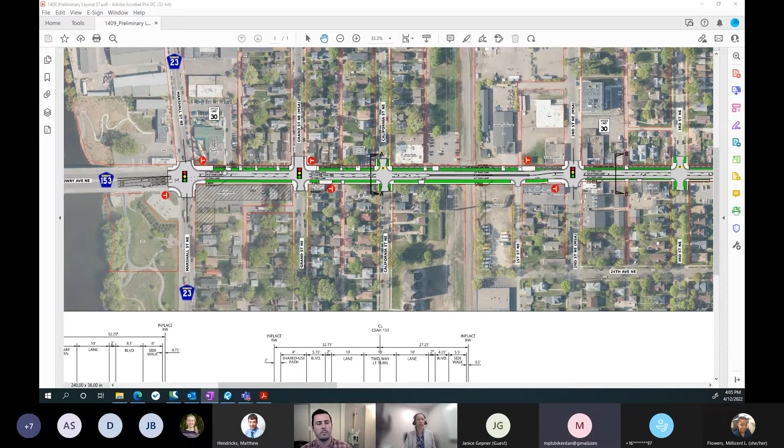The layout that is in the link in your agenda is the one that we're looking at on the screen now, and I think it addresses several of the items that were brought up as a result of the presentation in December and your resolution after that.

We've also looked at moving the shared use path to the north side of the roadway. Previously, we were showing it on the south side of the roadway.

Another big change to the layout since you last saw this is that in areas where we have three lanes for vehicles next to one another, we're looking at a 10-foot width there for vehicular lanes. Previously, we were showing 10.5, I believe. The outer lanes would still have a 2-foot width of curb gutter to the face of curb to use if needed.

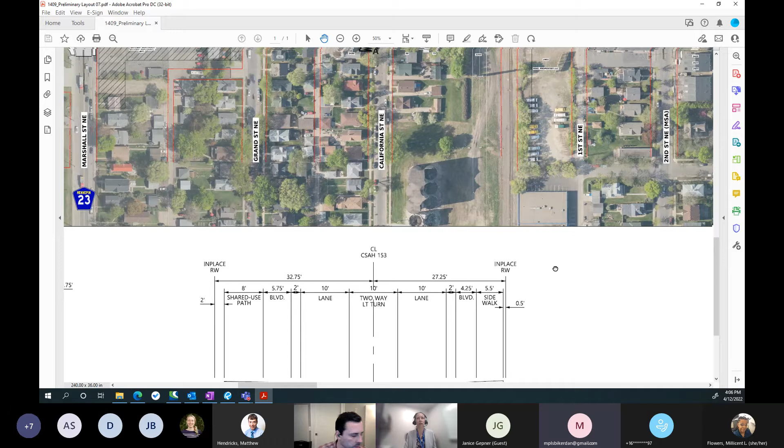But currently, this is how we have things depicted in the layout. What else can I point out here?

Another update as we scroll through the layout and get to the intersection with University Avenue is that we're showing a much less abrupt shift in the alignment along Lowry Avenue through this intersection.

Mostly we were looking at ways to minimize major impacts to adjacent properties and businesses and trying to avoid as much acquisition as we could while still accommodating a WB-40 size truck turning movement at this intersection from the MnDOT Trunk Highway to the county roadway.

But that still leaves a good amount of space on the north side for a shared use path configuration here. I'm just going to keep moving through the layout and try to point things out as we go.

We're looking more closely at the space that we have under the BNSF bridge overpass, and I appreciate the example that you pointed out in your resolution to look at a similar configuration on 18th, I think it was. So we did take a look at that.

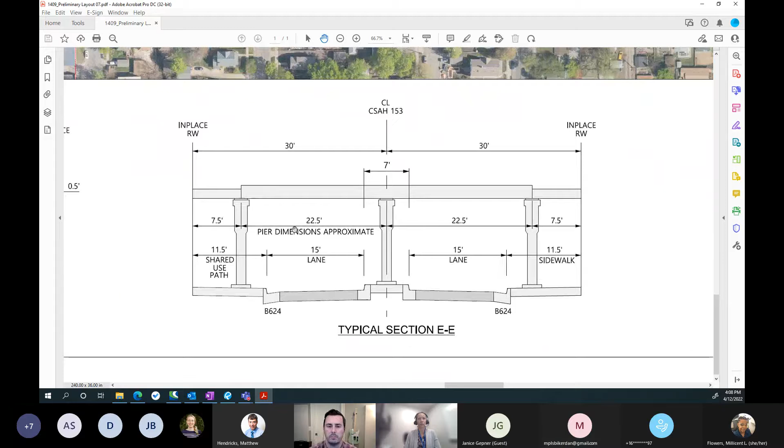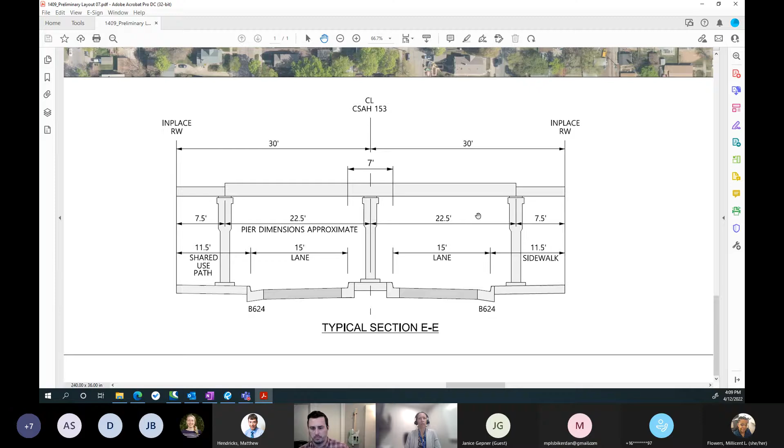We're pretty constrained on space under the railroad overpass and are looking at where the piers are today and how we could make changes to the roadway underneath the bridge to still have space for bikes and peds to get through. So this is one section included in the layout that you all have as well, to look more closely at the dimensions here.

I might be going a little quickly through this, if there's questions as I go. I'm not monitoring if a hand was raised yet. I don't see any, but you can jump in with a question anytime, or I can just keep scrolling through and we can look at questions at the end as well.

Also to note with this version of the layout are the transit symbols depicted as the black and white legend, which are local service stops that Metro Transit has plans to remove as part of this project, and kind of consolidate some stops as we go along the corridor to areas that are a bit more utilized based on their records and their counts.

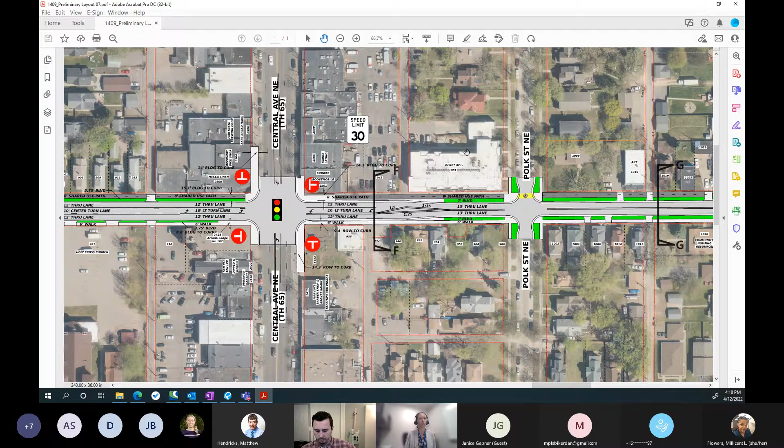We are looking at space for a possible future bus rapid transit line on Lowry Avenue, and we're looking at space for platform areas at the Lowry Avenue/Central Avenue intersection as well, exploring that with Metro Transit to make sure we're not designing something that would need to be completely redone when they come through with a future BRT line in the next 10 years or so, which was their estimate.

Let me go back to an area with medians real quick. We're showing cut throughs for crossings in median areas that were not depicted in the layout before.

Otherwise, previously we were looking at a shared use path east of Central to Johnson Street already. It was on the south side and now we're showing it on the north side. So that is an update in this segment of Lowry Avenue. Otherwise, nothing else has really changed here.

With the exception of adding a median at the Fillmore Street intersection with Lowry Avenue. This is where Metro Transit sees having a stop for local service instead of the stops currently at Taylor Street and Pierce Street on either side. So we're looking at putting in a median here to discourage vehicles from passing around a stopped bus and still stopping in lane.

I think those are the highlights of the updates that I have for you this round. Chris, did I miss anything? No, nothing that I can think to add right now. But yeah, happy to take questions or comments from members.

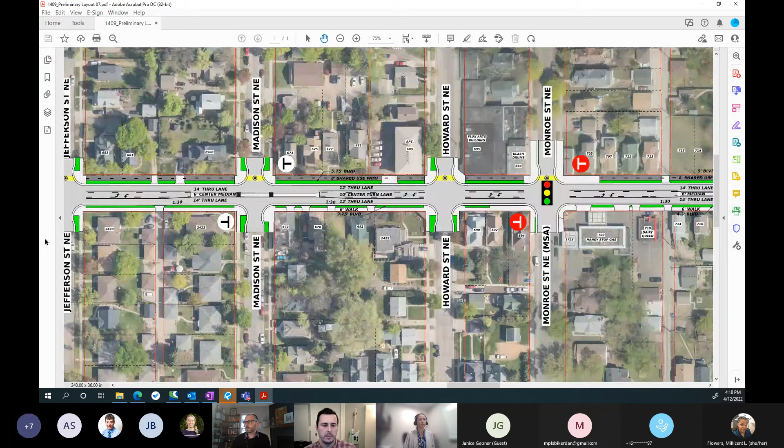I'll confirm that is shown on our AAA network, so that's a useful thing to point out. To address the first question about the bike cut-throughs, I think the city is interested in looking more closely at that, specifically for Fifth, which I think is the only one with a median that's also on our AAA network. That's something we can take a closer look at. We also haven't gotten to the discussion of what this means for emergency vehicle access and whether it needs to be mountable, so there are a couple details with those closed medians to figure out yet.

Okay, if we're ready to move on, Joey?

Between about 4th Street, my question is what is the minimum width you're looking at for the boulevards? From 4th Street northeast to somewhere east of Central, you're showing an 8-foot shared use path and a 6-foot boulevard. I like green space as much as the next guy, but 8 feet is really going to be pretty narrow for a bi-directional bikeway shared with pedestrians. So I'm wondering if you could consider making that even a 4-foot boulevard in that area to get the bikeway up to 10 feet—that would be very, very appreciated.

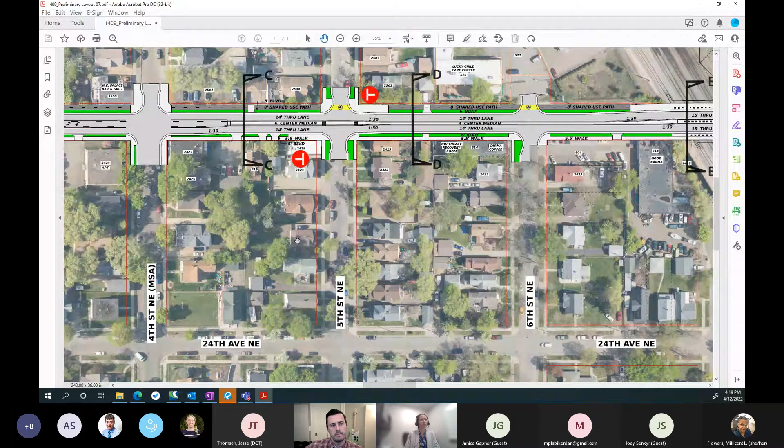Sure, I appreciate that feedback. We're definitely trying to show it as a 10-foot shared use path where there's a good amount of space to do that. In the location you're talking about, we're currently showing it as an 8-foot shared use path. We're looking at existing retaining walls along Lowry Avenue to minimize impacts to those, and also looking at ways to make sure we have space for pedestrian lighting enhancements along this corridor. Those bases take up some space, and you need some clear zone around them too, so it's a lot to fit in, but the width of the path is definitely something we'll be looking at more closely.

Could I add a word on some of the constraints? We're also dealing with above-ground utilities here. There's a big flood issue along this corridor, so stormwater infrastructure is something we're paying a lot of attention to, and as you're pointing out, there's not a lot of room to work with. Just want to put out there that those are a couple of the other things, as well as transit stations and being able to fit the path in to work with a BRT shelter eventually—just a couple of the constraints we're working with.

Thanks, Chris. Okay, Phil?

Kelly, thank you, it's great to see the improvements here. Simple question, I just wanted to clarify that the yellow markings are raised pavement as we cross. Correct. All right, yes, great. It's looking good, thank you.

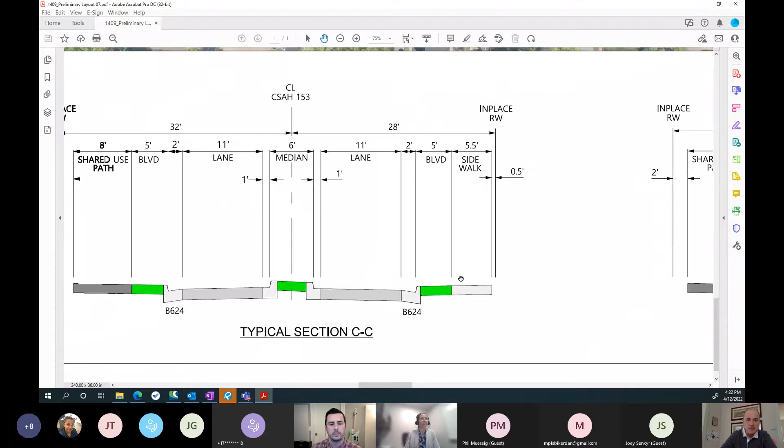Oh, okay, so it's 11. Yeah, I didn't mean to interrupt your train of thought there. Just wanted to share the typical section to give a little more context and clarity. I see, and the 14-foot width all the way to the curb face on either side allows space for county maintenance vehicles to get through for snow removal purposes and that kind of thing.

I see, okay. I was going to echo the sentiment about the width of the shared use path. It would be sad to ever see a boulevard constrained just for the need of trees, but if there could have been a way to get that out of the travel lanes, that would have been wonderful. It sounds like that's already been addressed—I think in these locations with the medians, we're at the minimum we could go for travel lanes.

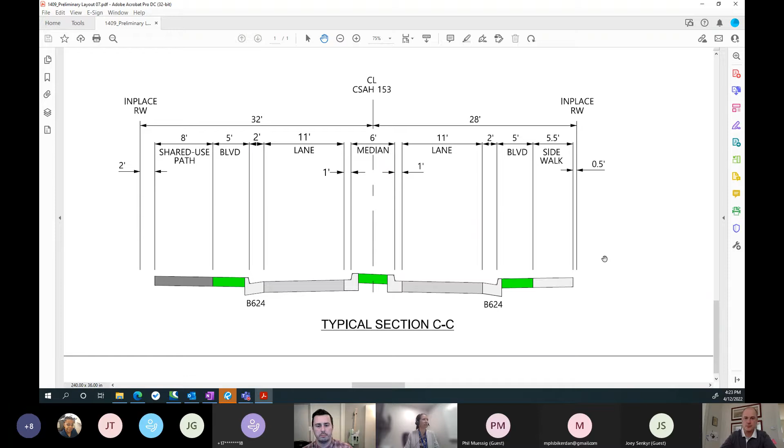Can I make a suggestion? Sorry, I didn't have my hand raised.

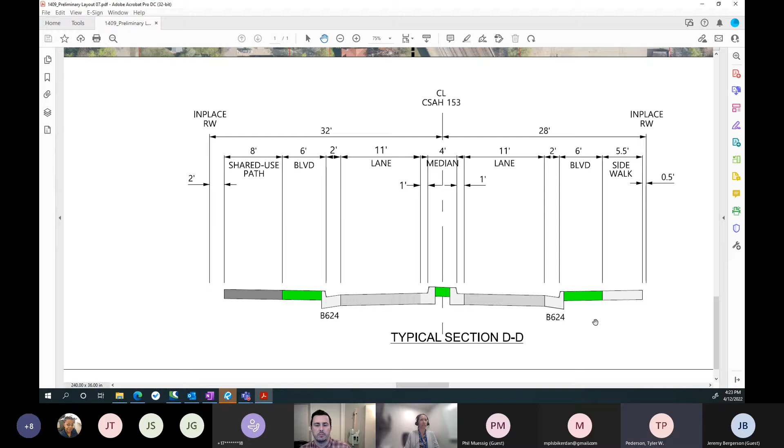This is Tyler from the Minneapolis Park Board. One solution you might look at is shifting so you have less green space on the south side that's shaded by buildings, and more green space in the boulevard on the north side, so you have space for trees and whatnot that will actually accept the sunshine.

Trees aren't going to grow really well in like a 4-foot boulevard. They're actually going to do pretty bad. 5 foot's really the minimum.

So if we did want to increase that shared use path width and take away from the green space, which I kind of never advocate for, being a park guy, I would suggest rethinking how you balance the center of that road, and planting on the sunny side of the road could be kind of nice.

That is a good thought. Thank you. Matthew Hendricks.

I think Matthew might be muted if he is talking. Thank you, I thought I had muted myself and had not.

So my question is similar to the one previous, about whether there is the possibility of shrinking something besides the boulevard. So going back to a 10-foot lane with the reaction zones on either side, so you have effectively 13, or in some places reducing the center median to 4 where 6 is shown, or if it's even possible to go less than 4 there.

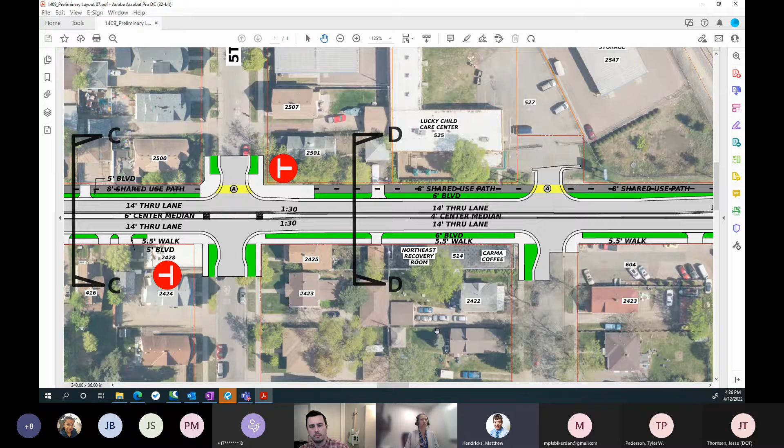I think there might be things we could look at with the median. The lane widths themselves are the minimum from what I hear from our maintenance staff to be able to get our vehicles through. The plows, from one edge of the plow to the other, are literally 15 feet wide or 14 feet wide.

I think it's partly too that when you're pushing snow material along, you need some space to react to the curb so that you're not just plowing along the edge of the curb. Okay.

Okay, I'm going to take a grab at this, Dan Miller. Kelly, you'd mentioned something about looking at some possibilities for underneath that bridge. Do you have any thoughts you can share with us on what you're looking at?

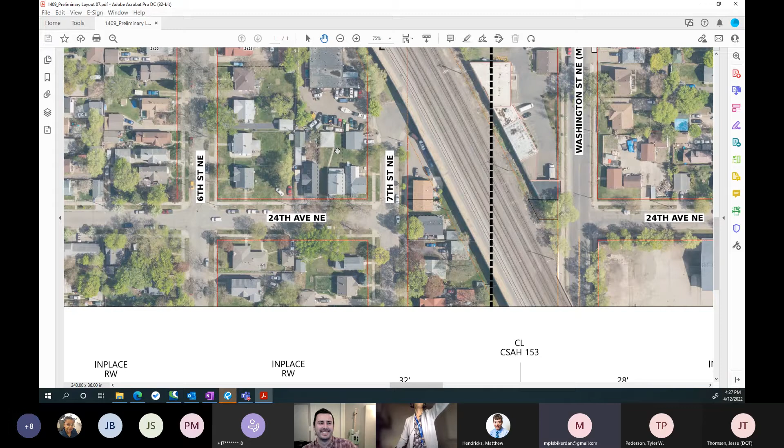Really, oops, the light's gonna go off in the office on me, sorry. Really, we only have the typical section that's included in the layout to show what space we think we have and what we could possibly do with changing the curbs under the bridge for the vehicle lanes. We are gonna look at the space a little more closely, get a little more accurate survey information and data that way, to get all of those little inches that we have under here, a more accurate picture of that.

Okay, just a minute. So there would be a chance that you could take that 15-foot lane and shrink it down and somehow expand the curb or create either a bike ped facility there, so you've got the shared use path for perhaps one type of user and the other for the other.

Right. Yeah, I think there'd be a way to use some space on both sides of the piers here. That's fantastic news. Thanks for thinking about that.

Absolutely. If there are other questions, please let me know. I'm going to go ahead and ask a few questions here until I see a hand.

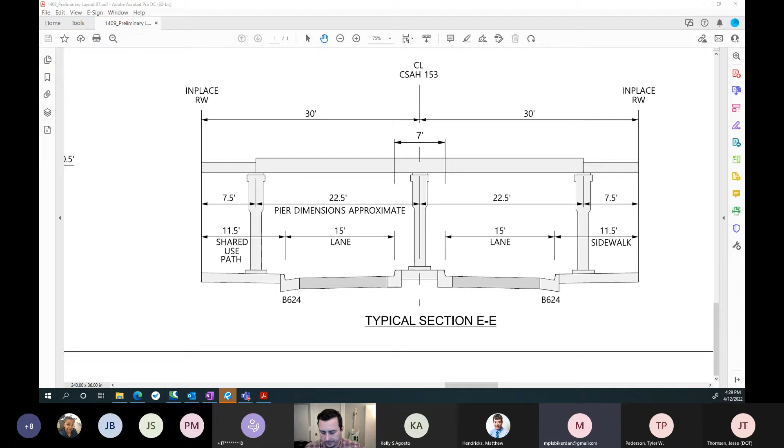We had talked about the raised crossings, and they're still in there, but they're not in the legend. I know that in other cases in the city, raised crossings have shown up on plans but have been eliminated, most commonly because of stormwater issues. How is that looking as a possibility? Is there a serious chance that will happen?

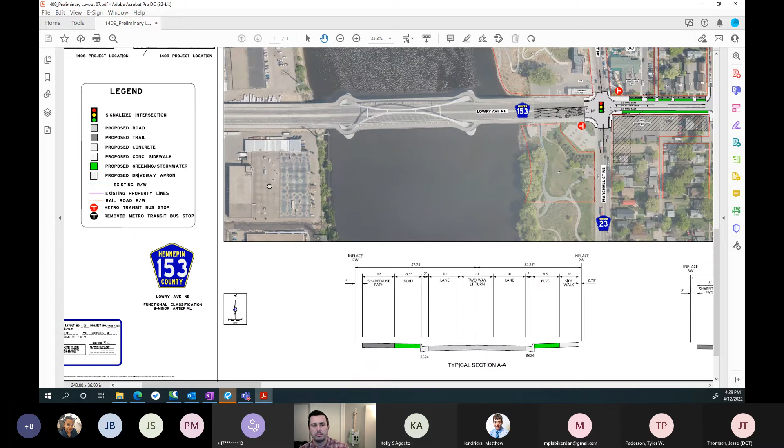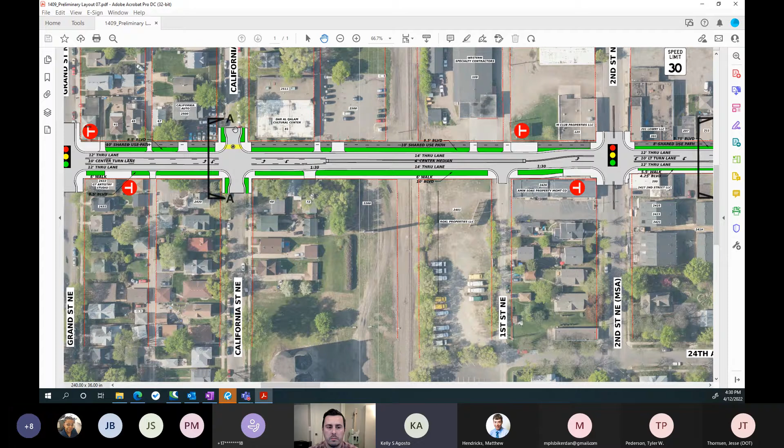Good point on the legend. I thought we had a note here saying we're looking at the possibility of raised crossings. Maybe that note shows up somewhere I'm not remembering, but you're right that there might be an issue with stormwater once we get into that analysis as our design work progresses, which would preclude raising that up through there. It's not a level of detail we've gotten to yet. Once we select a layout, we'll dig into those details more.

I've just seen them come and go, and they've been exciting because they provide continuity and safety to a trail. An ongoing issue I have is that if you don't have a raised crossing, you don't get zebra crossings across that thing, according to our street design guideline. I think both the county and the city should get something going. If we can't have raised crossings here, can we get something, whether it's the green conflict zone plus a zebra stripe, I don't know, but just so we've got continuity and safety on those intersections, that would be terrific.

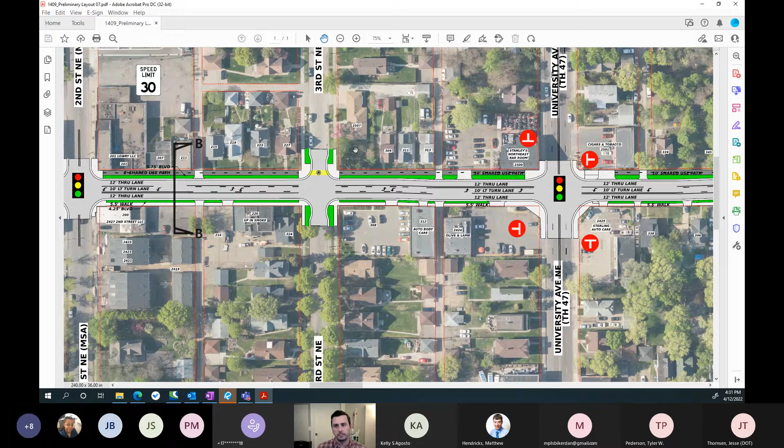And I don't know, Chris, do you have any thoughts? On the raised crossings particularly? Yeah, or just being able to push, if we can't get raised crossings because of this reason or that, that somehow those intersections are identified as a trail crossing.

I would have to look at our typical guidance on that. I think the street design guide shows what the signage would look like, especially if it's raised. Kelly is exactly right that sometimes the reason those don't happen is the engineering doesn't quite work out for the stormwater. But we can take a look at those details, and I'll make sure to keep that in mind, to flag those if they don't go through.

So far in my understanding, the street design guidelines don't address this, and that happened on Johnson Street, and it's going to happen on Bryant. It'd be nice to have a good look at those guidelines. The guidelines say they're open for change, and I think this is a great avenue to make sure that happens.

So I'm sure the path material hasn't been decided, whether it's going to be asphalt or concrete, but the driveways and cut-throughs throughout here, I'm not sure if they're cement and light in color or dark in color. Do you know what you're shooting for there? I think the driveways are being shown as concrete for material right now in our layout, and the path is being shown as bituminous. Because this is a continuity thing, if you look at 18th Avenue, it's a perfect place to take a look at this and ride it.

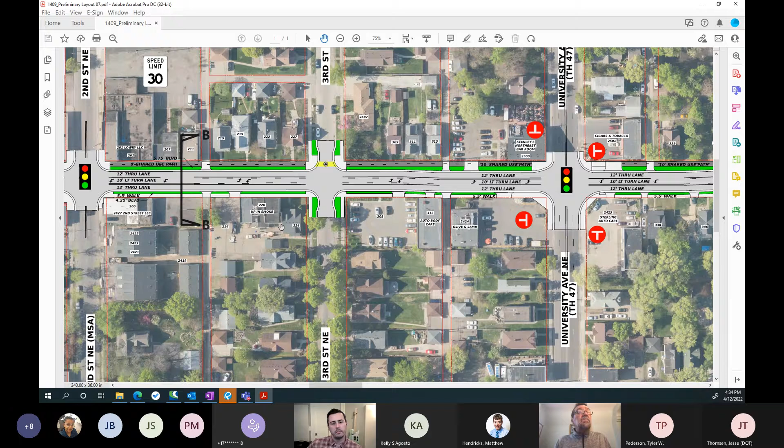No other hands. So one thing I find looking at this plan, I mean it's a great plan, it's come a long way since the last time we saw it, is that the intersections aren't fleshed out as far as how pedestrians move across them. In some cases at 30%, this is typically the last time we see a project, and stuff that may appear at 10% or 15% is really what the public and we are particularly interested in. Would you be willing to come back to show us what has been revised about this?

Well, yes, Chris. We haven't gotten into the plans yet for this project or some of the details that this committee has pointed out in your resolution to be able to address those points. So I think it would make sense to at least address the items you all have brought up and close the loop on that. Well, I appreciate that because you did that on University and 4th and it was fantastic. I know you worked through a number of those things, so thank you for that. Oh, you're welcome. Thank you.

Okay, I don't see any other hands up. Kelly, do you need anything from us? I'd just like to add that we're also looking at shifting the construction year for this project to 2024. We haven't updated our website yet, but we're just needing a little more time to address the layout that we're going to select and get through the design and right-of-way process. We're just looking at the flexibility we have with our federal funding to do that.

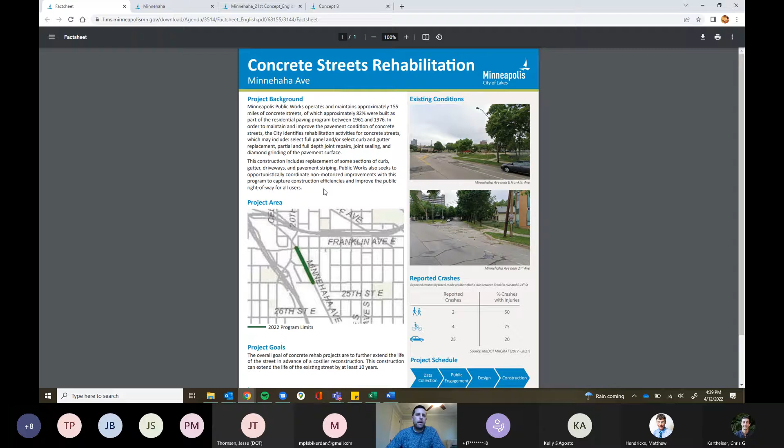And there's also some driveway work as it comes up, a little bit of curb and gutter in spots as needed. But the overall goal of this project is just to extend the life of the roadway ahead of any costlier reconstructions that may come through in the future. Depending on the condition of the roadway and the type of traffic it receives, this type of project can improve the life of the roadway by at least 10 years for the most part. So just a little bit of background, just as a refresher for this program.

Let me bring up a map here of what we're looking at. So this is a fairly short segment of Minnehaha. This dark gray that you see here is the roadway we're looking at. The project extends from East 24th Street to the south, and then heading up Minnehaha to the south side of Franklin Avenue. We won't be getting into Franklin at all. We'll be stopping just a little shy of there where the pavement changes back to asphalt.

We do have two intersections that we're looking at larger improvements for, and that's really what I want to show you all tonight. One intersection is this Minnehaha portion where it meets Franklin, and the other intersection we'll start with first is over here at Minnehaha and 21st. There's some pretty angular geometry that we want to address at that location.

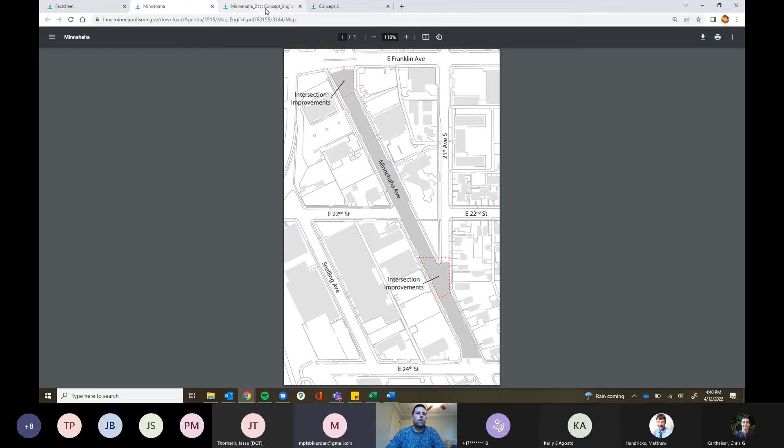So the first location I want to talk about is Minnehaha and 21st, and I'll show our concept for this area. Right now, Minnehaha has existing bike lanes, and we will continue to maintain those, so there's no change in the bike infrastructure here. But we do have some changes to the curb lines adjacent to the bikeway, which will help shorten the crossing distances across 21st Avenue and provide additional safety features, while also adding additional crossings that we're bringing up to grade for pedestrians.

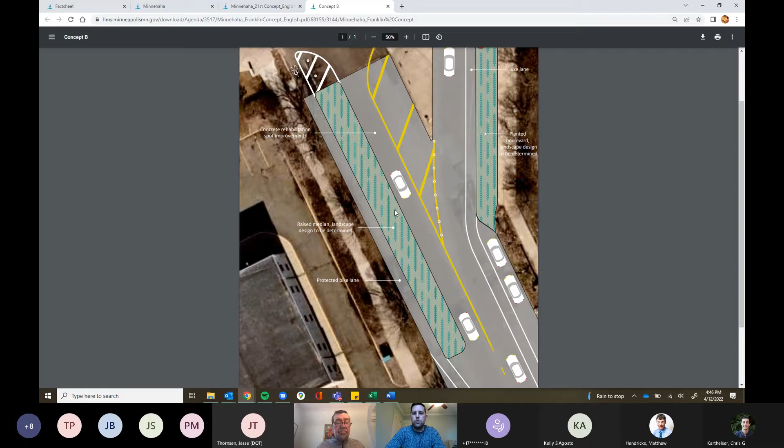Adrian? Yeah, thanks, this is Adrienne Bachheim from CPED. I just had a question about this one here at Franklin. I just went through this intersection the other day, and just north of what's shown in the image here on Franklin, there's that median there, so northbound cars and bikes can't turn left to go west. I'm curious, for a biker going north on this segment, if they want to go west on Franklin, what is their process for that?

Yeah, right now with this, since we're not getting into Franklin, this would essentially be heading the bike lanes into Franklin to go eastbound. Since there's that median there, we still wouldn't have a dedicated space to get out there and make that left turn. If they want to go west, I think maybe one of the options is 24th Street - I can't remember the roadway off the top of my head, but there's an opportunity to go west on 24th and then head north on that route. I think someone wanting to go west has to figure out that routing, and that's just one of the concessions from a few years ago when the county redid Franklin here and put in that closed median.

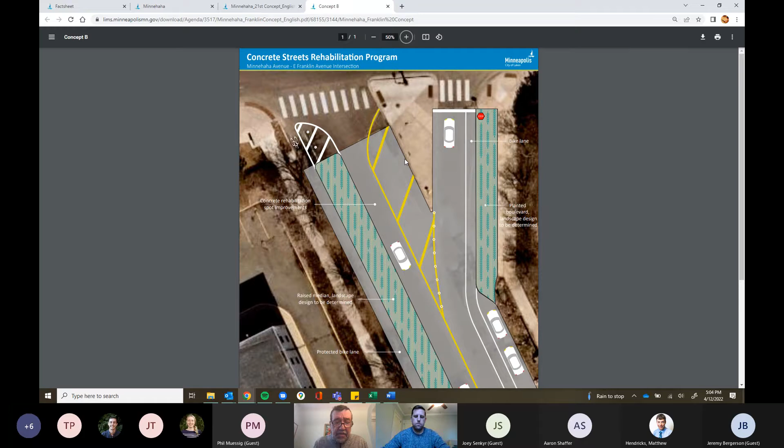And then where Aaron had talked about cars coming around that corner when it bends to the south, would there be a chance to extend that green space so it's more blocky on that corner, so cars can't just ease out of it? In other words, just lower it down and bring it to where the car is right now, the green space.

Yeah, and I'll note this is just kind of the concept plan, until the engineering sets are drawn up. I think they're probably drawn a little better than my Illustrator capabilities. So we'll make sure this has that standard function, so it keeps cars where they want to be, and we don't create a conflict where vehicles are able to just veer out easily into the bike lane. We'll work that out in the engineering drawings.

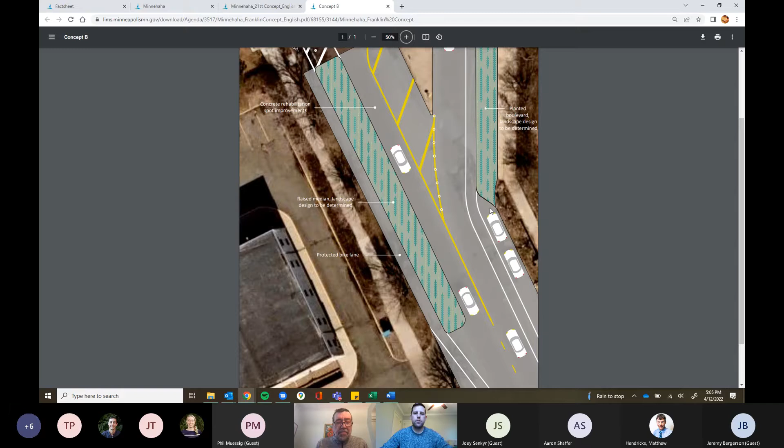Same thing in the other southbound lane where it's just bent in. Maybe if that extended out a little bit to the south, it might be a nicer transition, rather than the squareness that's there. And that could be just your illustration too.

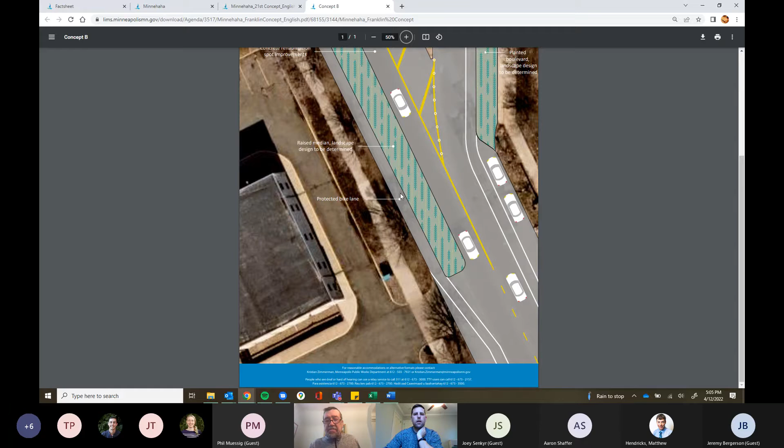Sure. Yeah. The last question, the bike lane widths here are? They'll maintain at 6 feet. Okay, and very good. I think actually this one here, since it's right up against the curb, we're actually looking at around 8 feet. Okay, very good. Thank you.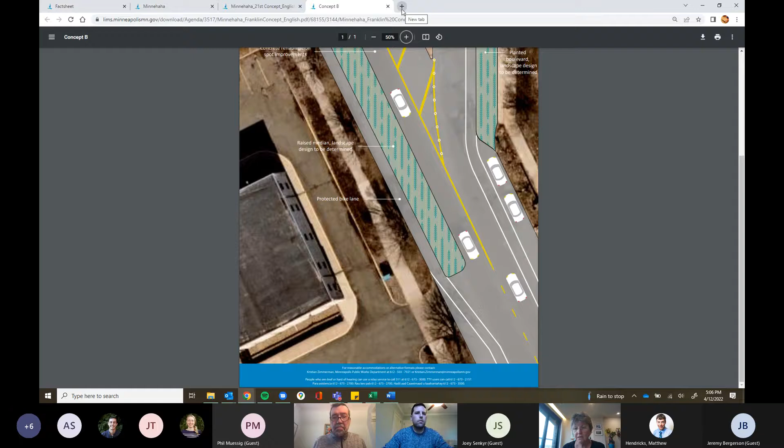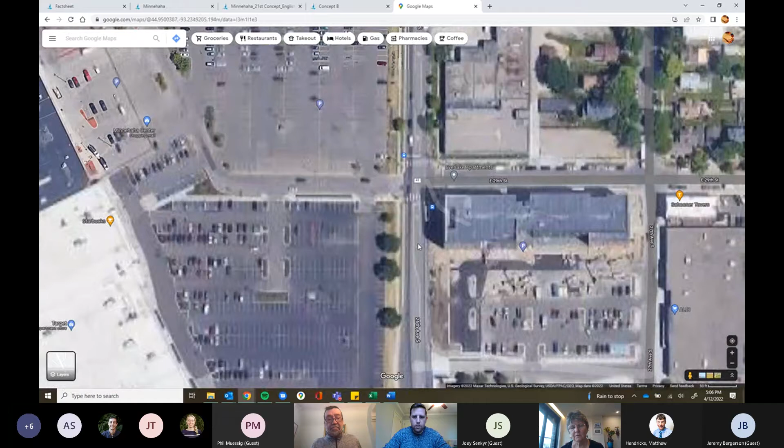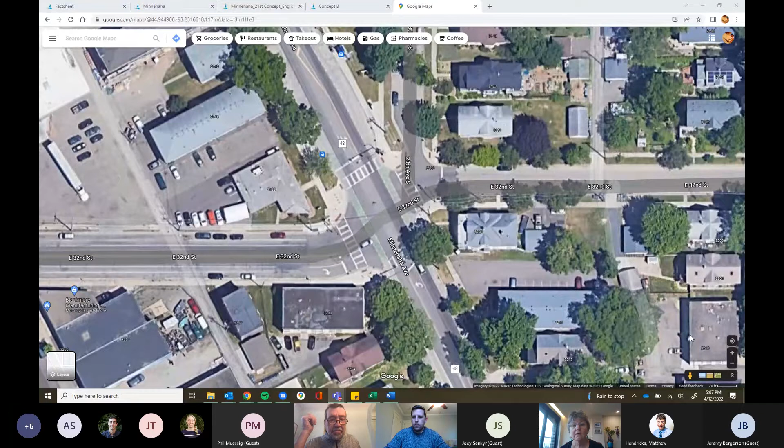Dan, or somebody, what is a green conflict zone? Maybe I can pull one up on Google Maps here. Let's see. Of course, sorry, one second. I'm just trying to find one that we've got. Here we go. Oh, it's a tree. So this is another section of Minnehaha that was constructed a couple years ago by the county.

As you can see, this green conflict marking is for the bike lane, and they're at signalized intersections. Kind of what they do is signal to cyclists and to vehicles that this is a point of conflict where there may be a shared space, especially at these turns. So it's an indication to vehicles to give that right of way and be aware of cyclists, that this is their dedicated space as they come through these intersections. It gives that extra highlight at a predominant intersection, typically where you have more turning vehicles, just to be aware of the cyclist. Sometimes the cyclist and vehicles share the space as vehicles make a right-hand turn, so it's a visual cue to each other to be aware of each other's presence.

And so why would you not put it at the Y there at 21st? So typically we just do these at signalized intersections. We don't do them at our more local streets, typically just where we have a larger volume of turns occurring, which is typically at signalized intersections. Okay, so in essence, you don't see enough volume here. It seems to me like it would almost be more needed if it's not signalized, because cars would not be looking behind, looking in their mirror, expecting a bike to come through at that intersection.

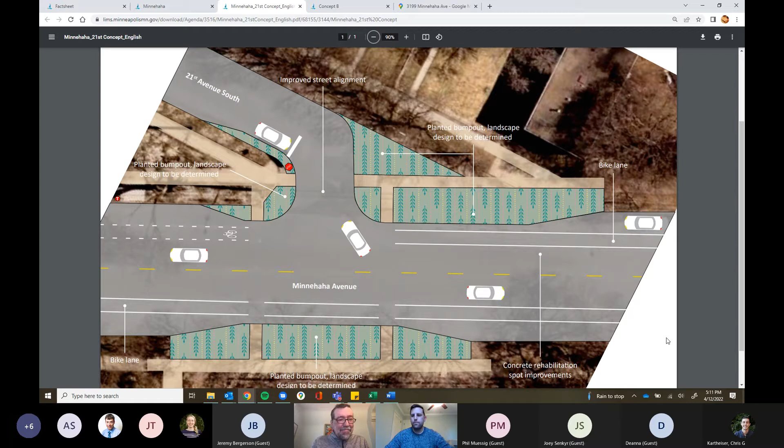All righty, up next we have the 2nd Street South improvements, 2nd Avenue South to 13th Avenue South, 0% with Dan Edgerton from Zan Associates.

Hi, Dan. Hey, friends, how's it going? Good, thanks. Great, thanks for having me.

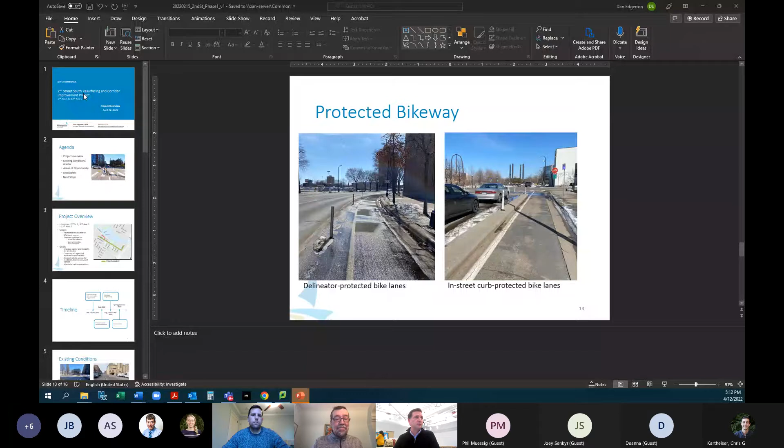I'm going to share some slides with you, so bear with me as I switch the technology. As Dan said, my name is also Dan. I'm Dan Edgerton, a contractor with Public Works and the TPP group. I work under Nathan Koster, and I work with Chris and do a lot of work there. My employer is Zan Associates, but I'm functioning as an extension of staff as the project planner for this project, so I'm here to tell you about the 2nd Street South project.

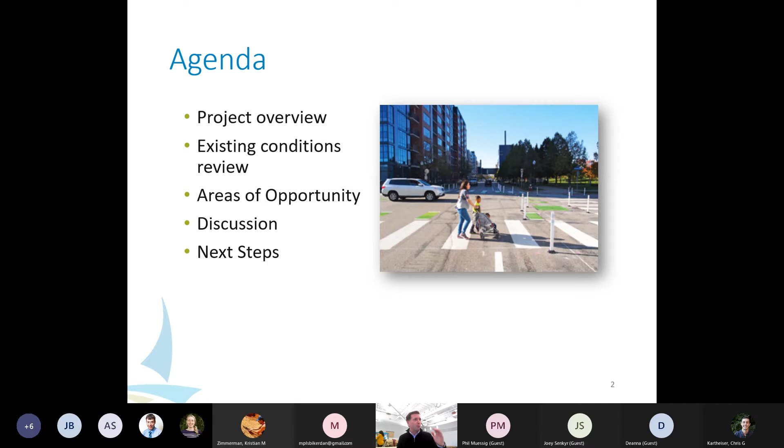I've got maybe a dozen slides that I'll run through quickly to give a project overview, and then I'll pause and we can have any discussion you might have for me today. So with that, a quick project overview.

We are downtown in the Mill District, by the Guthrie, by the Stone Arch Bridge. The project limits are 2nd Street South, one block north or northeast of Washington Avenue. We go from 2nd Ave on the west, just past Hennepin, all the way down to 13th Avenue on the east, right up to 35W. The project will wrap around on 13th Avenue and make an opportunistic connection to the West River Road trail. So that's the project limits.

The scope of the project, really the impetus, is that 2nd is planned for a pavement rehabilitation project in 2023, next summer. That looks like a standard mill and overlay, a maintenance project designed to extend the life of the pavement. What we're doing is taking an opportunistic look at the corridor while the city is there doing the pavement rehabilitation, to see if there are opportunities to make additional improvements to the bikeway along the way. So it's kind of a low impact type of project.

It's being considered for funding through the Bikeway Funding program, it's Bike 28 if anybody follows along with that. But what that means is it's a small level project, not a full reconstruction like your Grand Avenue or Bryant Avenue. It's a lower level of impact.

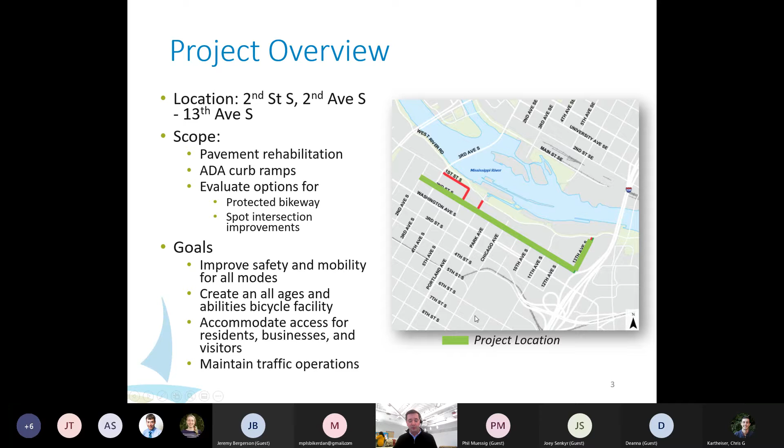A little bit on timeline. We're just getting started with this. Dan mentioned that this is 0%, that we don't have a concept design yet. Kind of have an idea of where it might go, but we need to go through the process and vet that all out. So that's what we're doing now, the concept design and community engagement.

The idea is that by later this summer, we'll have a recommended layout, and then we'll have over the winter to do engineering, and then we can queue that up for installation next summer, 2023, on the back of that pavement rehabilitation that I mentioned earlier.

One thing to note, because this is a maintenance project and not a complete reconstruct, it follows a bit different process than some of the construction projects that you see. It doesn't have a formal council layout approval. Instead, it goes through as a recommendation. That's noteworthy as you think about things like what's the BAC's role in passing a motion of support, that kind of thing. We can talk more about that later.

But that's the timeline. So I've got some slides that just show some pictures and illustrations of what's out there today to ground folks if they're not familiar.

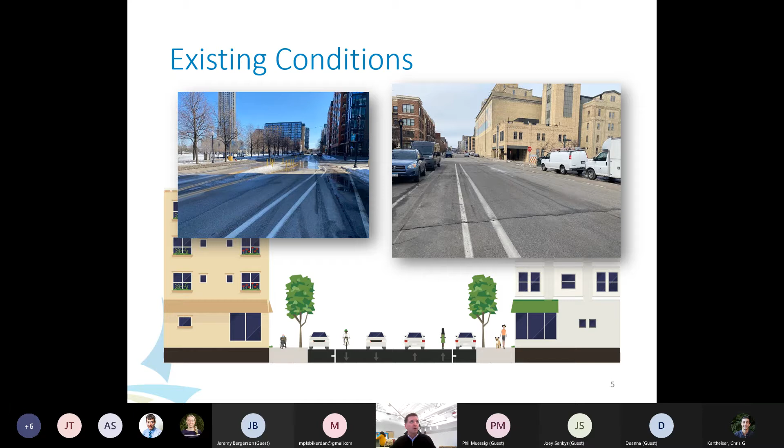So this is the stretch that goes right by the Guthrie, by Gold Medal Park. It's a really important connection for the bike network, the AAA network, and we'll show some maps later.

In a few locations there are these, I think, temporary delineator posts that were installed. The purpose of those temporary delineator posts is twofold. I think it helps to better manage vehicle speeds, to encourage safer vehicle speeds, but really it provides an opportunity for a safer, shorter pedestrian crossing.

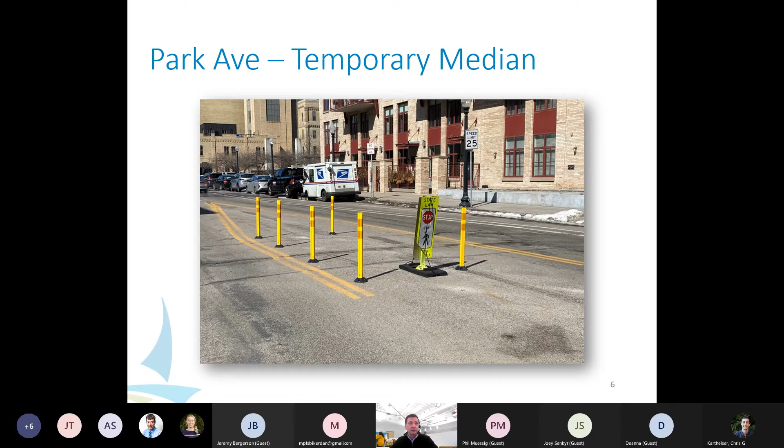So those temporary style medians exist in two places along this project. One is Park Avenue, and the other is 10th Avenue. Park Avenue is just west of the Guthrie Theater, and 10th Avenue is just east of the Guthrie Theater, sort of making those connections to the Mill District, to the Stone Arch Bridge, that kind of thing. So they look like this.

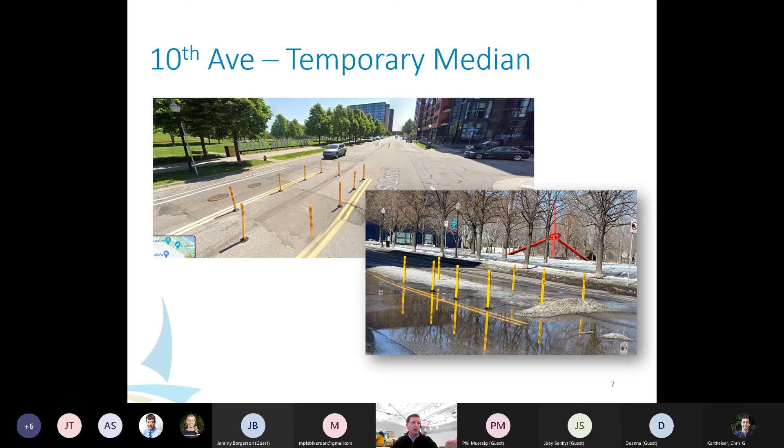I've got another slide on this, but I mentioned earlier that we're looking at the potential to evaluate upgrades not only to the bikeway, but also to spot intersection areas. And these are them — these are the intersections that we're looking at.

And finally, 11th Avenue. This is another intersection that's got a lot going on, with these temporary delineator posts that were put in as part of another project a few years back. Maybe some of you are familiar with it. We're also, while we're there, going to look at what's happening at this intersection and see if there are any improvements we can make within the scope of this project. So it's part of the puzzle.

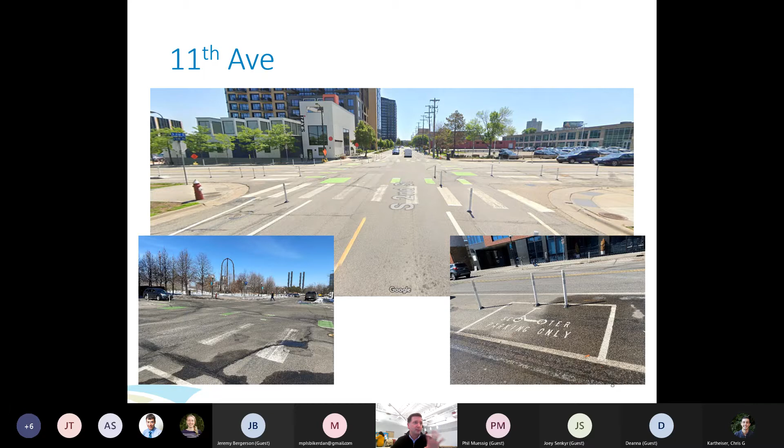I just wanted to flash this slide. This will be familiar to many of you, but the point I like to make here is that 2nd Street is an east-west connection that's really critical on the AAA network. It provides direct connections to a lot of really high volume bike facilities. And one of the things I've heard on this is, well, you've got Washington a block to the south, and we recently upgraded that to the cycle track.

Yes, that's true, but that doesn't go all the way down to the 35W project area. And as of now, Washington Avenue is a county road, and the county doesn't have any plans to finish that bike trail.

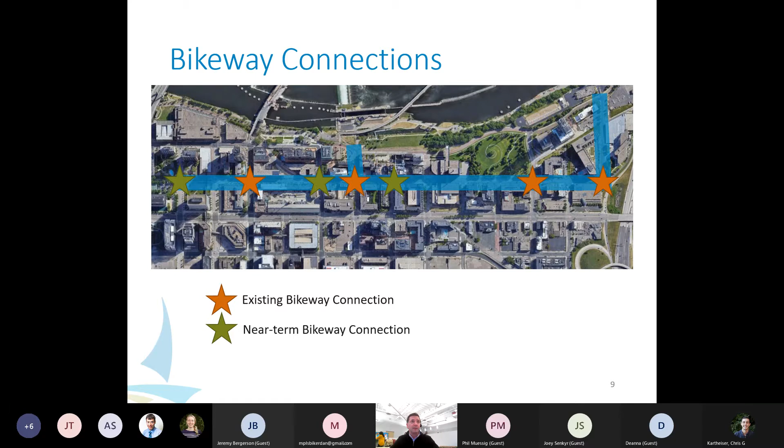So 2nd Street becomes that link in the network to make those connections. It's a really important bikeway connection for the city.

So, opportunity areas - I've touched on most of these, but what I'm tasked with is taking a look at this pavement rehab project and seeing if there are low cost, high benefit improvements we can make in an opportunistic way, since we're going to be there anyway.

That looks like the intersection improvements I mentioned: Park Ave, 10th Ave, 11th Ave. There's also a bump out at the Guthrie that helps connect to their parking ramp that we'll take a look at. And with the bikeway, today they have the directional bike lanes - are there improvements we can make?

Can we upgrade that to a protected bikeway configuration? That could be paint and delineator posts on the low end. On the higher end, maybe floating curbs - there are some illustrations of what those look like, we can talk more about that. But can we upgrade to a protected bikeway condition, and what does that look like?

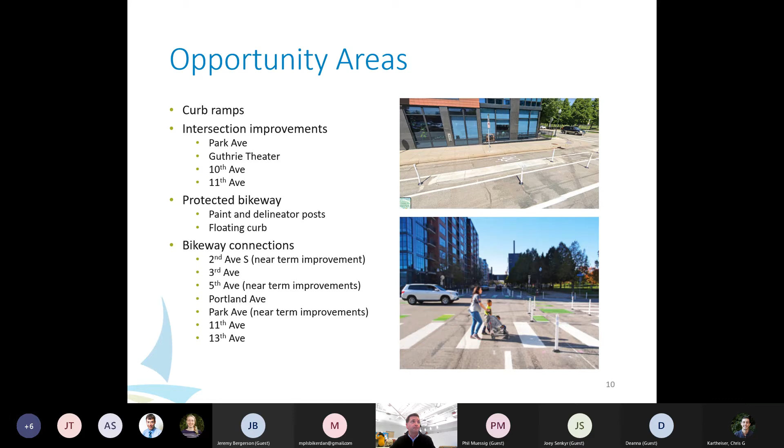So just a few slides with more pictures, and I promise I'm almost done here. Intersection improvements - what that might look like is a floating slab of concrete to take the temporary delineator post pedestrian crossing and make it a more permanent median. There's an illustration of what that might look like.

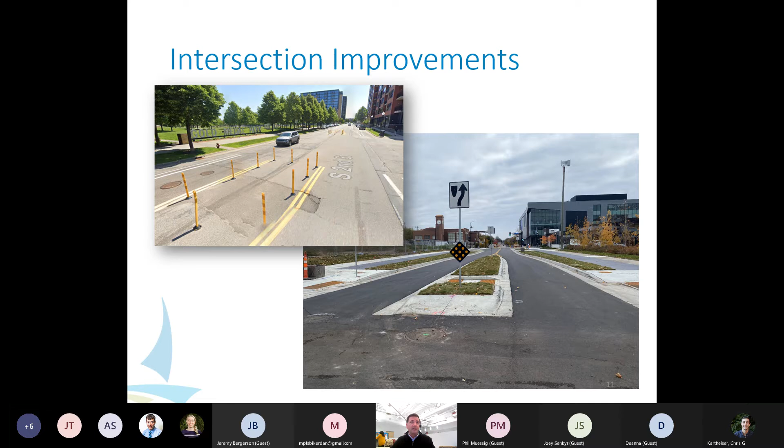This is a terrible picture, I know, but I was out there a couple of weeks ago, right after we got our false spring and had a snowstorm.

This is actually 31st Street and Blaisdell, I believe. But can we clean up that 11th Avenue intersection to make it a little more intuitive for all the users? It's kind of hard now with the crosswalks and the conflict striping, which we talked about in the last presentation, and then the post. It's just a complicated intersection with a lot going on. So can we clean that up?

And then bikeway improvements - the base level of improvement we'll look at is, can we go to a delineator protected bikeway? I think in this case we'd look at a two-way bikeway, probably on the north side of the street to avoid driveway conflicts. It hasn't been designed yet, so there's some flexibility there. Two-way bikeways tend to simplify decision points at the intersection, and we've had success in other parts of the city putting those in.

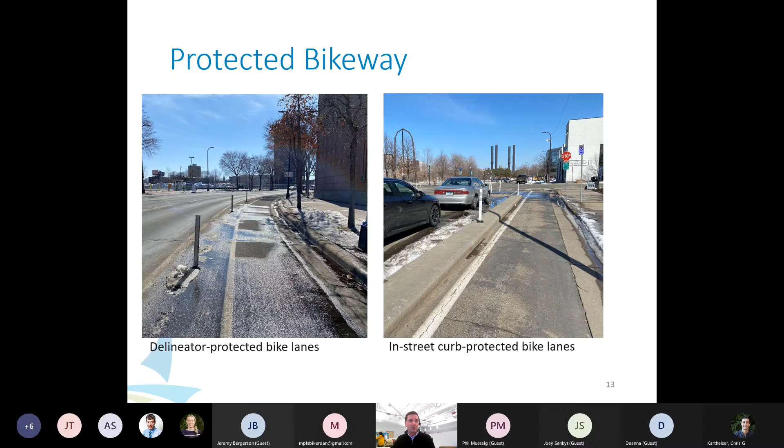If we can afford it within the budget of the Bike 28 program, I would love to see the in-street curb protected bike lanes go in, but it's a bigger cost item. So it's something I'm thinking of as a continuum or hierarchy - if I can recommend a base project, great, we'll do this at a minimum. And then if we can add additional features that will be used, we'll keep adding up until we reach our budget cap and get the best project we can afford. That's sort of how I'm looking at this, and this group can certainly help make that case and tell that story to decision makers. So I look forward to some discussion there.

Okay, so this is my last slide before I stop. Just quick on next steps - I'm doing community engagement now, this is it, we're just starting with you. I've also got neighborhood meetings, a meeting with the Downtown Minneapolis Neighborhood Association later tonight. We'll do direct one-on-one outreach with the adjacent properties, meet with other community organizations in the area, mailings, things like that - all moving towards a recommendation on what we hope it'll look like later this fall, with hopes of having the project installed in 2023.

So that's the end of my presentation. I'd like to pause for discussion, and I'll turn it back to Dan and open it up for questions and comments.

Okay Janice, just to clarify, were you saying that right now there's two one-way bike lanes and there's a possibility of a protected two-way bike lane on the north side along the whole length? Is that what you were saying? That's correct. I haven't gotten to the design stage yet, but what we're thinking is that it might look like a two-way protected bike lane. So that's the kind of thing we should weigh in on with a resolution, I'm assuming. Absolutely, yeah.

And just to chase that thread down a little bit, we do have it kind of drawn out, but it hasn't been engineered yet. We think that the north side works better. There's fewer intersections because you've got the park and the theater. If there was a compelling reason to do it on the south side, we could look at it, but that's kind of where we are in the design process now.

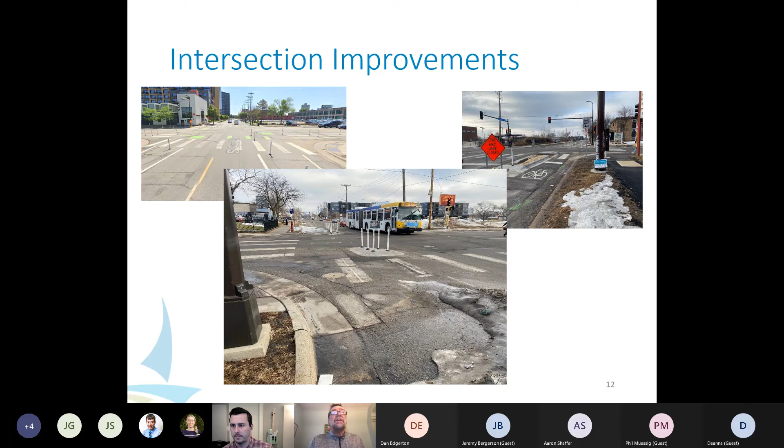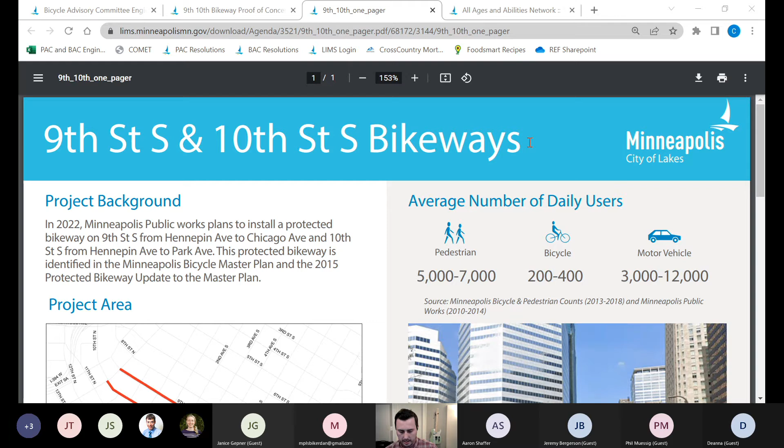Okay, we've got the 9th and 10th Street bikeways downtown, with Chris Kartheiser. Thanks, Dan, and hello everybody. I'll try and make this presentation quick so we can still get out on time, but happy to stay as long as needed for questions. So 9th and 10th Street bikeways—we've been looking at these in different variations for a number of years in Minneapolis. We're currently looking to have this project budgeted for 2023, so next year we'd be looking at installation, and hopefully arrange that so it'd be on the earlier side of implementation next year.

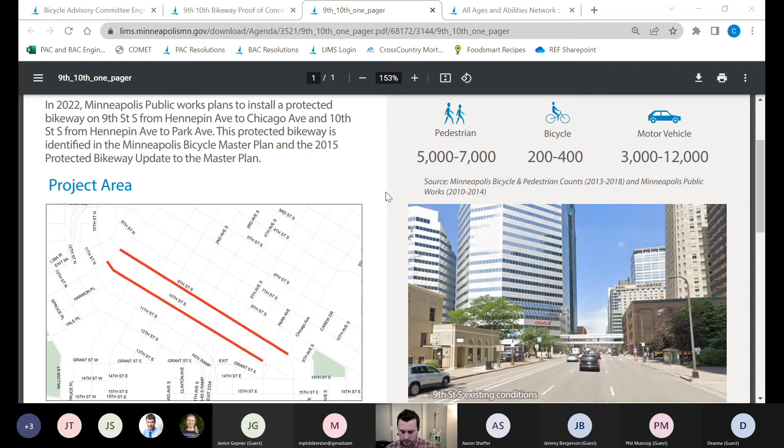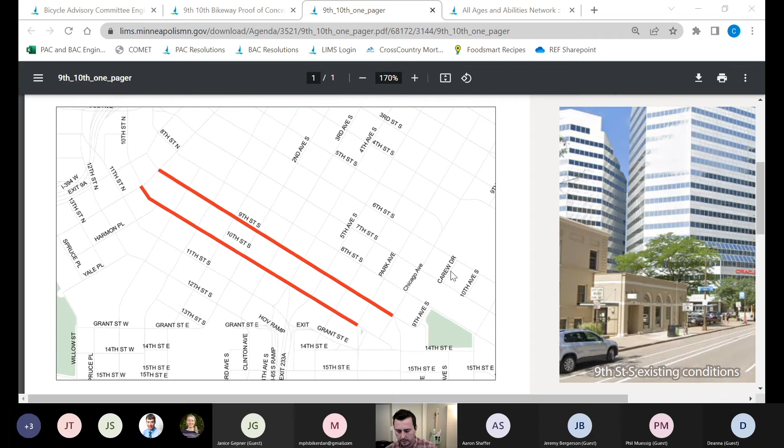A little background information: a lot of pedestrians, some kind of low to mid bike traffic currently today, and then 3,000 to 12,000 vehicles in different parts of the area. There's a project map there, so you can see we're going from Hennepin Avenue on the northwest side to Chicago—this is actually Centennial at this part—and then Park here on 9th and 10th. For those who don't know, 9th and 10th downtown are parallel one-ways, so that's why we're looking at these together. You can see existing conditions there: we've got the bike lane on the left side, just a standard bike lane with a small buffer, 3 lanes of traffic, and parking on both sides of the roadway. 10th has a little bit less parking along the corridor, but some parking as well.

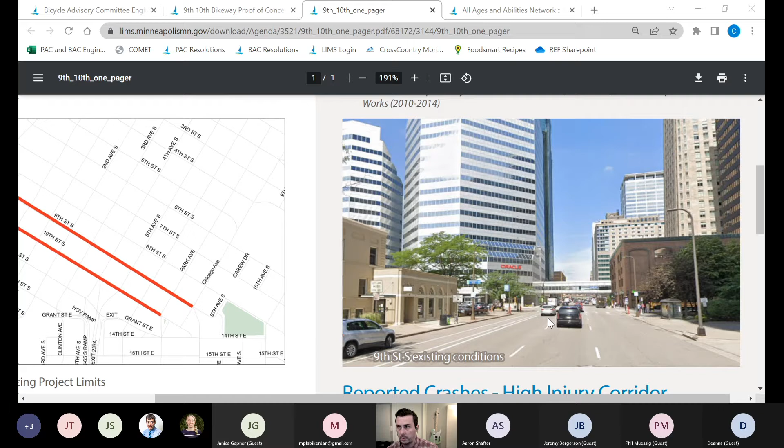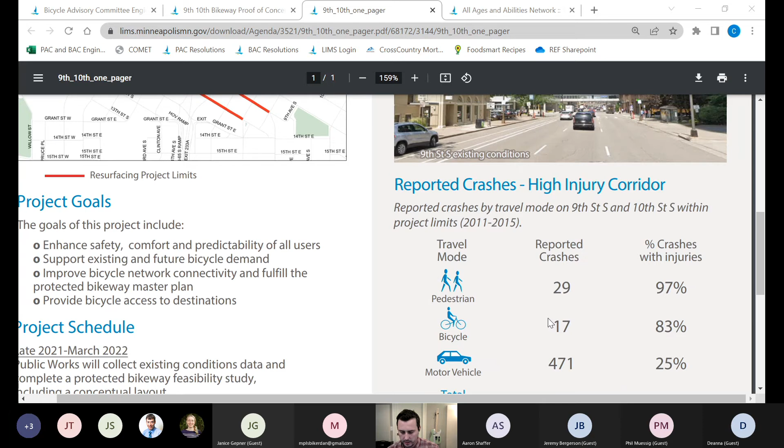9th is a high injury street, and also just generally downtown has a decent amount of crashes. So that's something we're paying close attention to, and we will be treating this.

I'm working with our Vision Zero team to make sure they get their typical Vision Zero aspects put in with this project. The bikeway project has potential to satisfy a lot of the Vision Zero design we would do, but there are a few extra things we'll add that we may not typically do on all our bike projects.

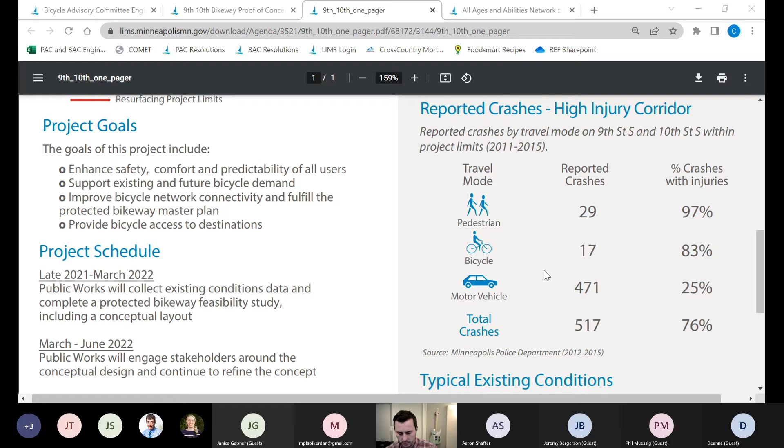I'm going to switch over. Briefly, I want to explain why it's at 10%. This is the first time you all have seen this project; it hasn't been brought before. The reason I put it at 10%, and the reason there's been some design work, is that some of you may know there's a history on 9th and 10th.

Sometime in the last decade, maybe 6 or 7 years ago, there were conversations about putting in a bikeway and potentially a protected bikeway, and that did not happen. So I wanted to be sensitive of that, to take the time on the front end to do some of what I've called a proof of concept here, as a starter template for conversations with folks who weren't interested in this the last time around.

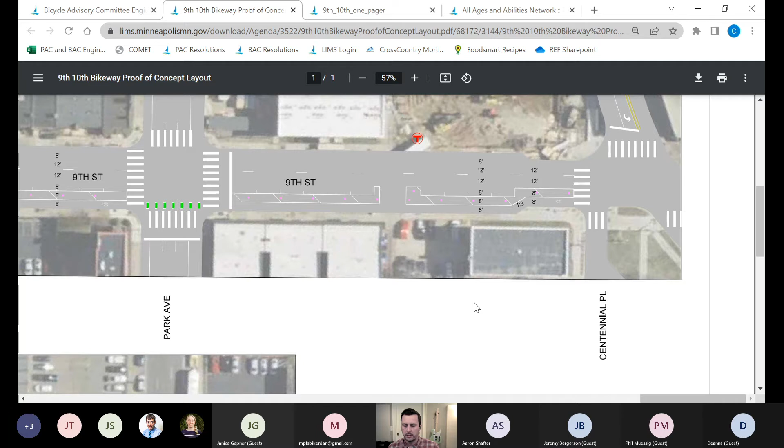Essentially what we've done here is ask, okay, with our new design standards that are different than when we looked at this 7 years ago, are we able to maintain particularly the parking with this temporary bikeway design, and for the most part travel lanes. There are some parts where we're looking at removing travel lanes in order to make sure we can have a AAA facility, and more conversations are needed on that.

That's a little bit on why there's been some more design work. This is by no means a finished concept. A lot more work needs to go into this, and I'm looking forward to feedback on what this looks like. So with that, I'll run through it quickly.

On 9th, we have a parking-protected bikeway for the length of the corridor. There are currently 2 travel lanes out there on 9th today, and we're maintaining what's out there in terms of parking and travel lanes, but using the extra road space to create this buffered area and the bike lane.

One thing that will definitely change, and we've started looking into but it's not quite ready to bring here, is these protected elements. We're going to be looking more closely at the best design in terms of mixing zones or protected intersections and things like that. I expect a lot more detail to come out by the next time I come back here.

Some of these blocks are pretty standard, and because there are one-ways, there are no turning movements. So this is an easy one, a protected bikeway the whole way through, where we don't have to worry about any left turns. We're also looking at maintaining all current access routes, loading zones, and things like that.

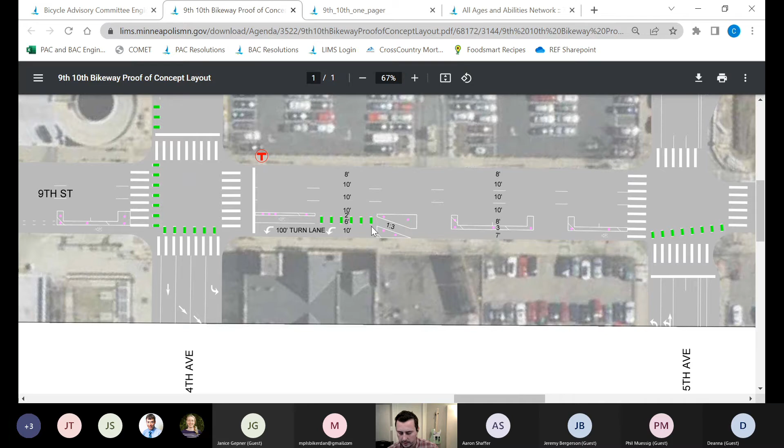Again, these transition areas could look very different in the next iteration, and likely will in many cases. We do have examples in the city that look like this, with a mixing zone where there's still some protection, but turning vehicles are in there with the bike lane. This is NACTO guidance on how to do this taper and mixing zone.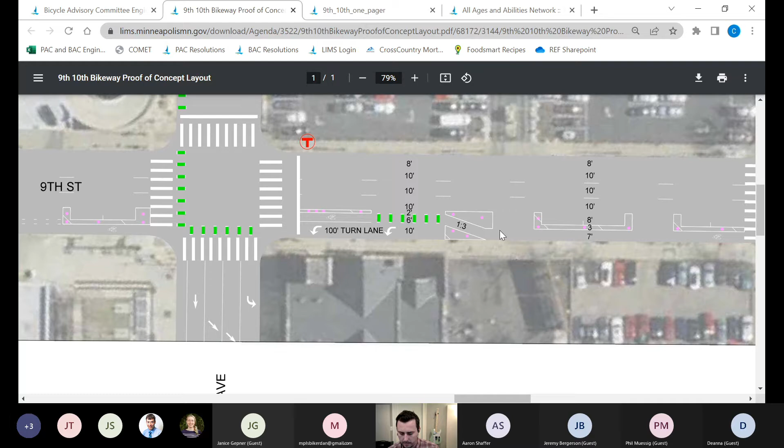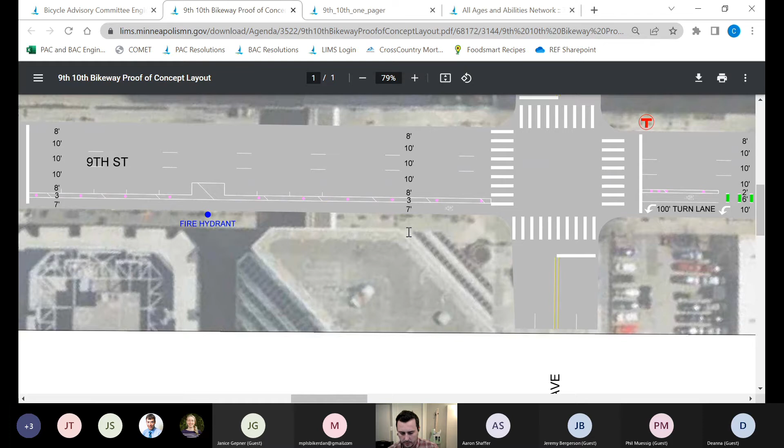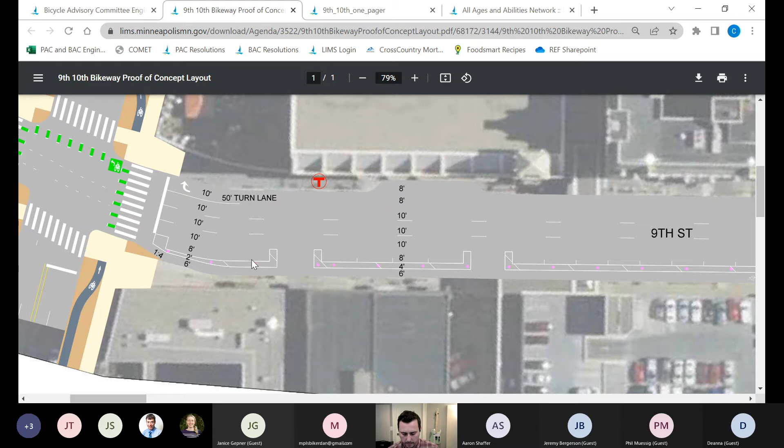I'll keep moving. A lot of these blocks look similar to some of the previous ones. As we get closer to Hennepin, there's a slight taper up, and then we would connect into the Hennepin Ave bikeways there. Then quickly on 10th, like I said, there's a lot less parking.

There's less parking-protected, or no parking-protected, on certain blocks. Two blocks here are the ones we'll have to look at most closely, as they are the most constrained blocks on the corridor.

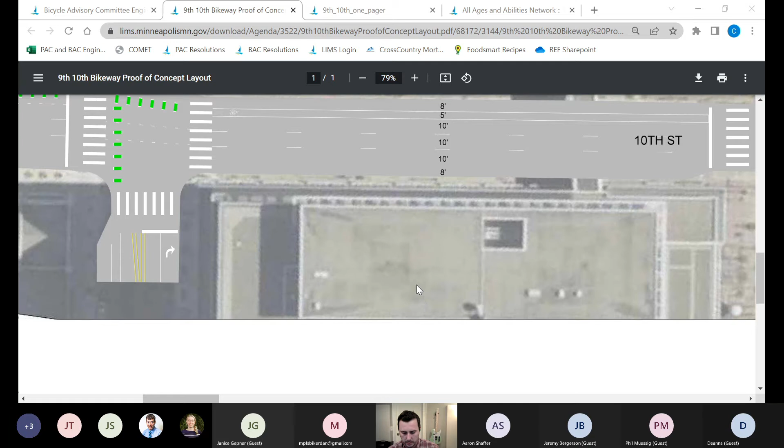So 10th here between LaSalle and Marquette is a little bit trickier, in that we're at minimums already with a 5-foot bike lane, 10-foot travel lanes, and technically 7-foot parking is the minimum you can go, but when we have all other minimums, then 8 is the minimum we can go.

So this is very constrained, and we are in conversations about what it would look like to remove a lane of travel here to ensure that we have a AAA bikeway the entire length of the corridor. So that would be for both of these blocks.

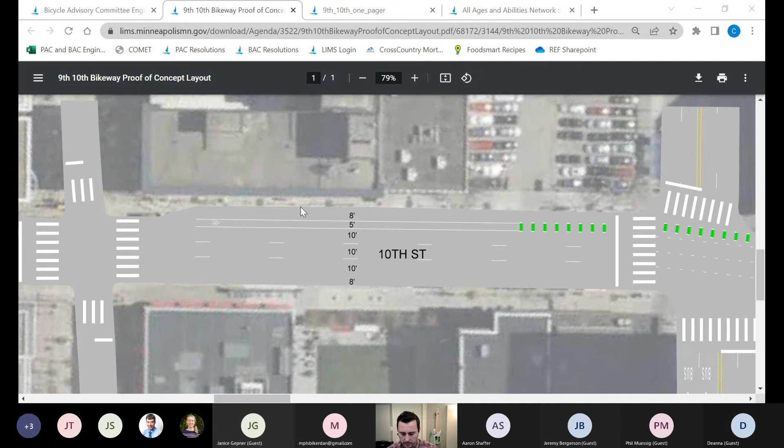This one's a little bit trickier because we have the bump outs here that secure the parking. But also if we were able to take a travel lane, we would be able to get a AAA facility in there. Then the rest of 10th is pretty straightforward.

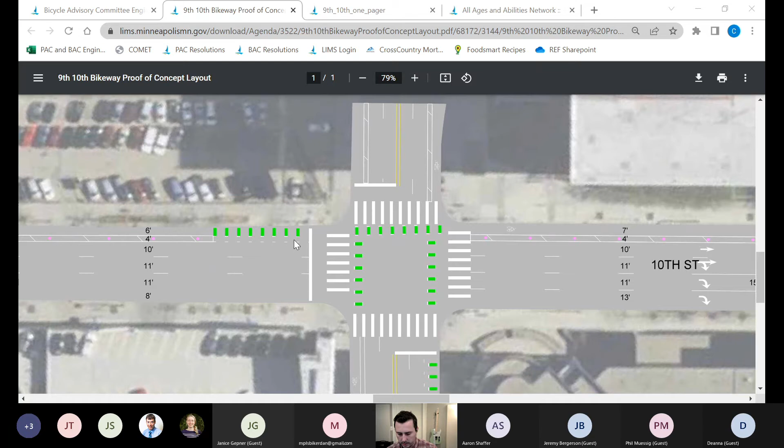The bike lane stays on that side of the roadway the whole time. There's a couple mixing zones. We'll also look at some protected elements where there's space for it along 10th. And then it tapers down to 2 lanes here, a little bit less vehicle traffic.

And it's pretty straightforward until we get to this intersection, which is Park and 10th, and we'll be looking at some very detailed design about how to do this right now. The tricky part is having a bikeway where you want to allow the bike to turn left, but the bikeway is on the far side on Park.

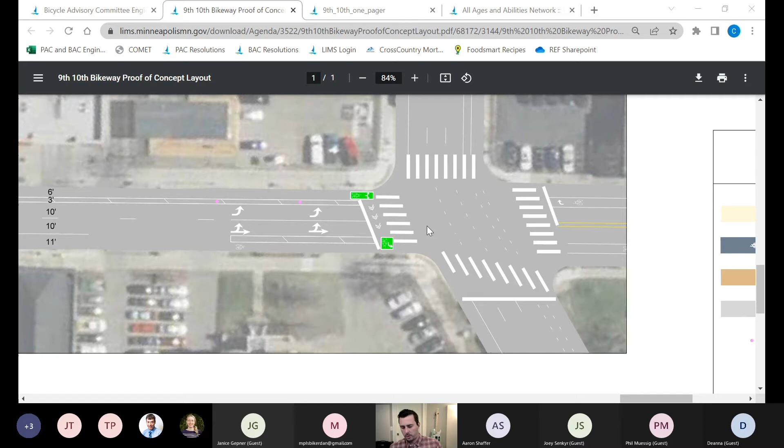So you'd essentially be putting the cars turning left onto Park in conflict with the bikes there. There's a few different ways to manage it. This was a very preliminary look. I think we'd be looking at a mixture of protection and mixing zones, allowing bikes to get where they need to go.

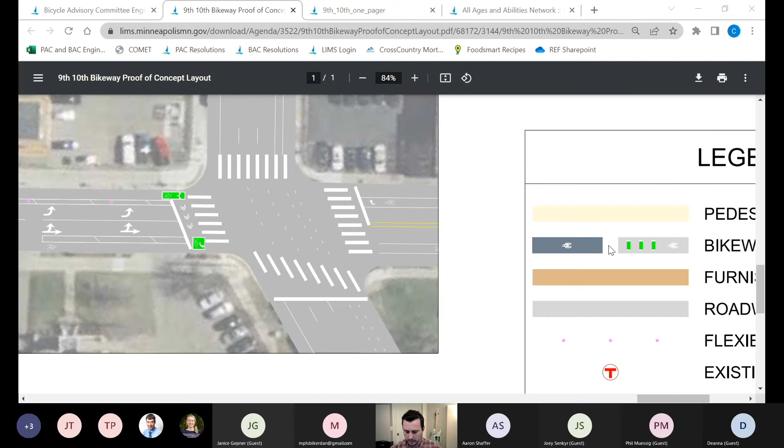And currently today, there's something here that allows bikes to go straight and continue down 10th as well. So that's just a really quick throw of the whole layout at you.

I'm happy to go back over any details, take questions, comments. Definitely plan to be back here at a minimum of once, but possibly more than that.

And actually, one other thing I should mention, which I think we talked about last time, is that we are putting in a regional solicitation application for this project. Not for the project I just showed you, but for 9th and 10th as a separate project that would follow this one.

And so with that project, we would be looking at putting more curb in. We could potentially reevaluate this design entirely, or just protect this design by putting curb in, or potentially, depending on funds available, at certain points maybe putting bikes behind the curb on the sidewalk if it makes sense. But all that would be figured out in a separate process if we're awarded those funds.

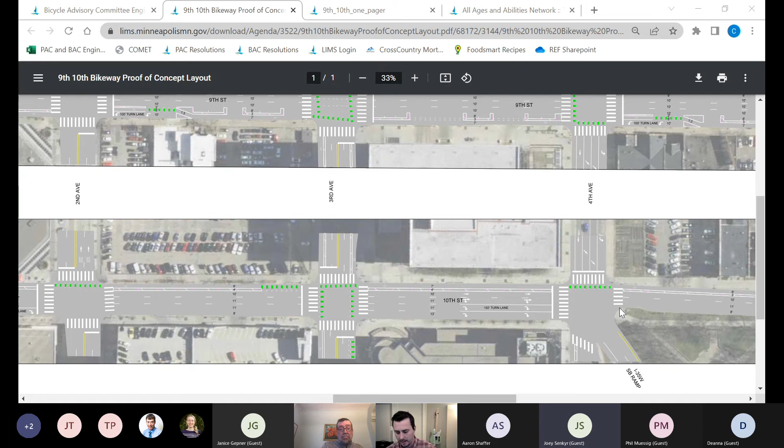This intersection would be really tough, almost harder I think than navigating the switching of sides at the end with the interchange. We have looked at that, and it's something we could look at again, probably most likely for the regional solicitation. But if this group has a strong opinion on that, I don't want to shut that down. I'd be interested in hearing it, I don't want to stifle that conversation, but that's some of the thoughts I've had to date.

That's a good point on 10th, I hadn't been thinking about the interchange there. My second question was about the jersey barriers you mentioned. Has that been successful? Because most of this looks great, I'm very excited, but for that portion between Nicollet and Hennepin on 9th, switching from jersey barriers to flexipost is going to be making it less protected than it is now.

Yeah, so the jersey barriers were never meant to be permanent, that's not a permanent solution. The downtown council actually paid for the installation of those, so that wasn't public works. I did help coordinate that, we coordinated with that. That was a very direct request that came out of property owners, MPD, and the downtown council about dealing with those issues right there.

It's never been the intention to automatically decide that we wouldn't, today with that temporary we don't have any parking out there. Not that we couldn't take away parking with this conversation, but that would also have to be a part of the conversation. Per space, I think it's about $50,000 a year that a parking spot downtown brings in, so it's no small amount.

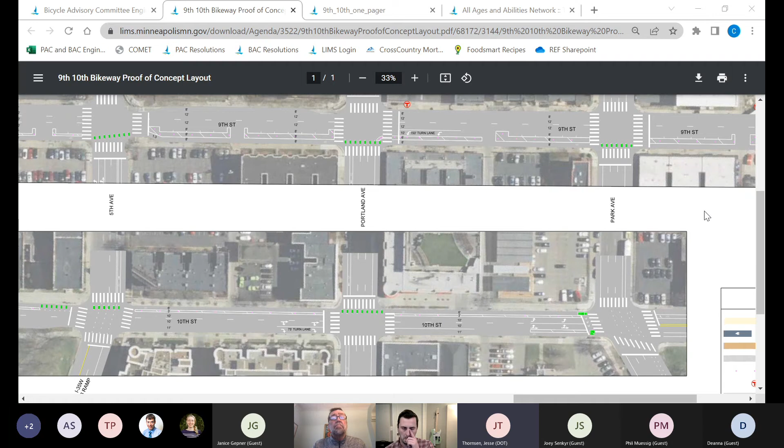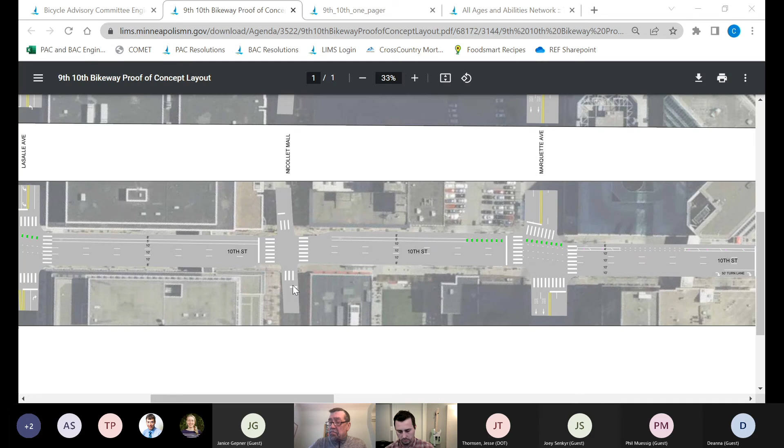Out of necessity, I've used 10th a lot to go back home after picking up my daughter from school by bike. And I feel like the two most stressful blocks are the ones that have the least amount of treatment here, the ones that have parking on both sides. So I would definitely urge us to see what we can do about having minimums for everything, because the 8 plus the 5 is 13 total, and it's still not enough to have enough room for folks to park and to have people riding bikes next to them, especially because of the different side of the road and not being expected.

I think oftentimes here we find ourselves riding on the outside white line of the bike lane, because the people who are parking here are usually either on the striping for the bike lane or a little bit into the bike lane. And then obviously there's dooring situations too, but I haven't been doored yet, it's only a matter of time.

Yeah, no, those are very good points. And like you had asked about existing conditions - these are actually the existing conditions out there today, what's shown on the screen. So it's not a AAA facility. And if we don't improve that by taking away a lane of travel would be really the only way to do that, or potentially parking, to get that protection. I appreciate all those points.

Aaron? Yeah, so I may not have any groundbreaking question, but I'm curious, is the plan then, because this is a AAA network, would it be to have curb protection through it, like concrete curb, or would it be bollards?

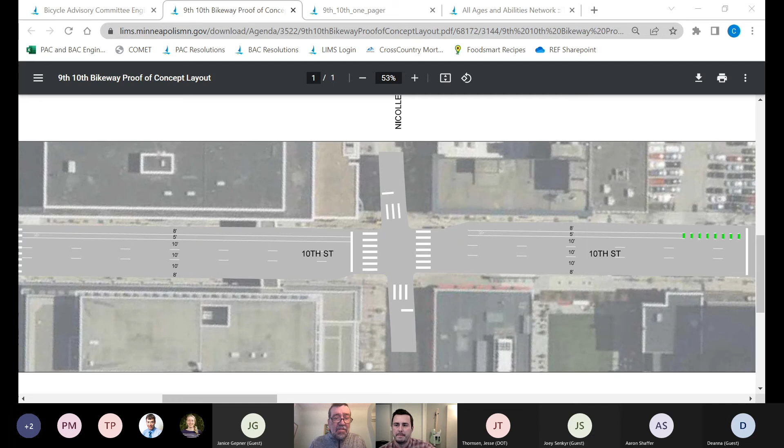Thank you. Okay, Janice? Nope. Anybody else have any questions here for Chris? Thank you, Chris, this is looking good. Yeah, thanks everyone, good comments. Alrighty.

I think Chris, would you like a resolution on this or some support? I don't need one at this point. If there's anything really substantial that you all want to call out, maybe it could be helpful to have a stance on the spot between LaSalle and Marquette. If you all wanted to do something, either way I can bring the feedback back from the group. I think it's probably pretty supported across the group, whether there's a resolution or not, that you'd want that to be a more protected leg.

Okay, so we have several resolutions that are worth taking a look at. I've asked in the past if there are people particularly interested in leading up any of these. My intent would be to have something roughed out by the end of the week and then distribute it to the members who attended this meeting for comment before it heads to the full BAC meeting. And I see Phil's hand up.

Yeah, sure Dan, I'll help with that - I can start to sketch out Minnehaha between Franklin and 24th. Okay, very good, thank you.